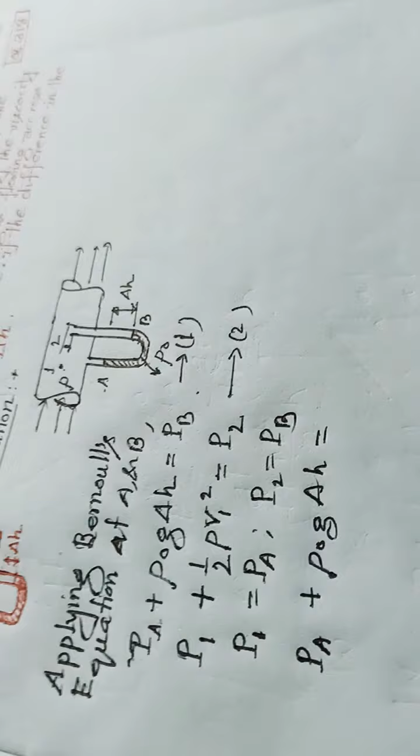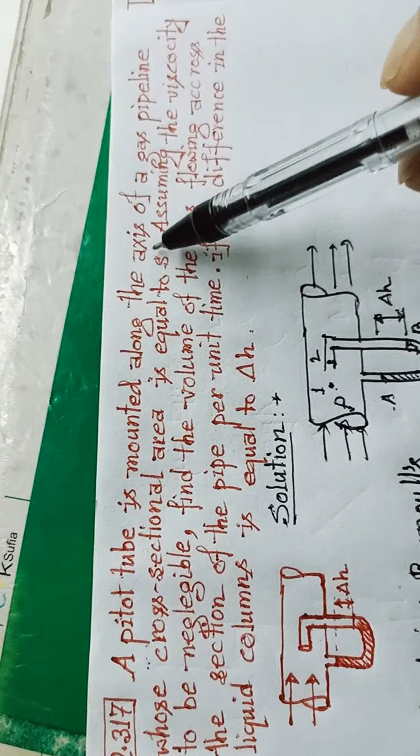Now we are going to solve question number 317 from Irodov. In this question it is given that a pitot tube is mounted along the axis of a gas pipeline whose cross sectional area is equal to S. Assuming the viscosity is negligible, find the volume of gas flowing across the section of the pipe per unit time if the difference in the liquid column is equal to del H.

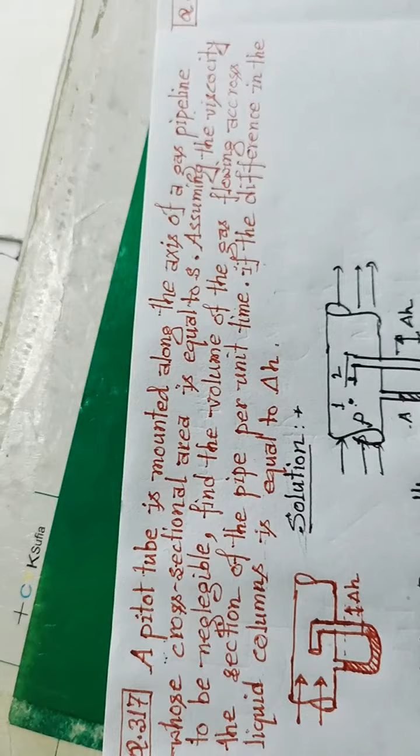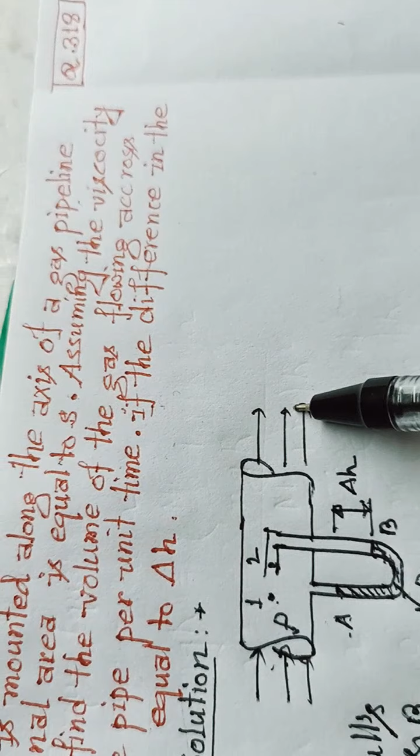So this is our corresponding figure. From this figure we can draw this diagram. In this diagram, this is the inlet section and this is the outlet section, and we are considering 4 points: A, B, 1 and 2. This AB section is filled with a liquid of density rho naught, and the density of the fluid or gas is rho.

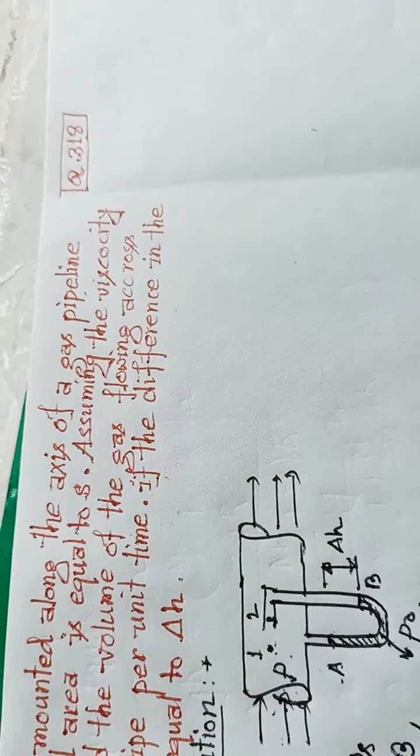Now first of all we'll consider the Bernoulli equation for point A and B. If we consider the Bernoulli equation for point A and B, then it will provide PB equal to PA plus rho naught G del H, because our corresponding figure was like this.

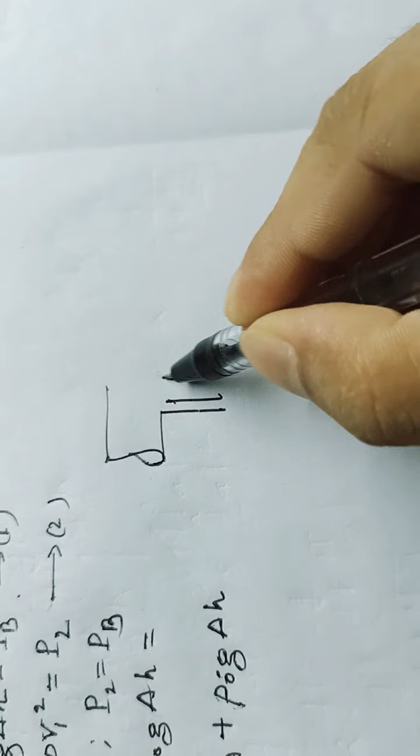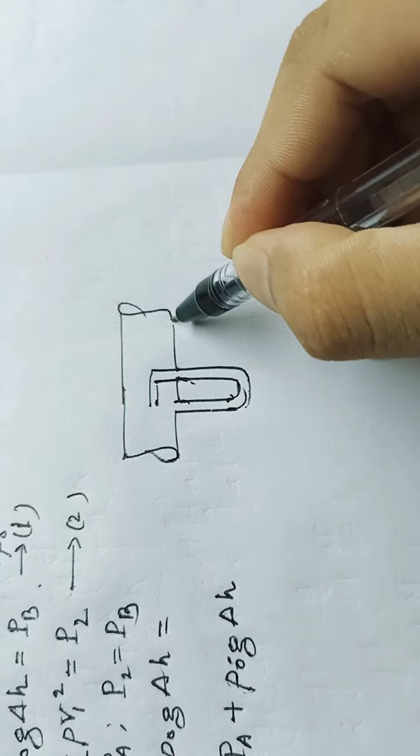This was our segment of the pipe, segment of our pipe, and this is a segment of our pipe. This is the liquid height at this limb, and this is the liquid height at this limb, and the height difference between the two is del H.

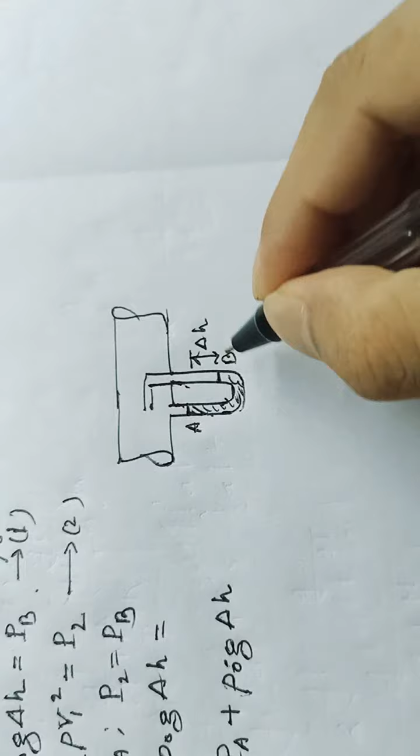Now we are considering point A here and point B here, and let there again be 2 points. One point is this, point 1 is here and point 2 is here, and let this be the inlet segment where gas is flowing, with density of the gas rho and density of the liquid rho naught.

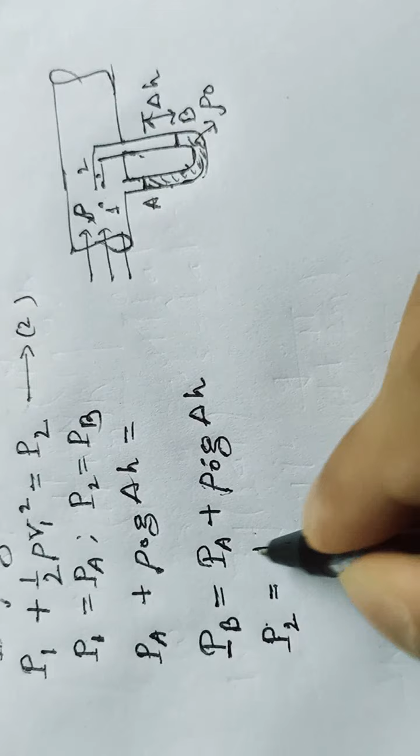So from this equation, if we apply the Bernoulli equation at segment 1 and 2, we will find PB equal to PA plus rho naught G delta H. Again, if we apply the Bernoulli equation at point 1 and 2, from this equation we will get P2 equal to P1 plus half rho V squared.

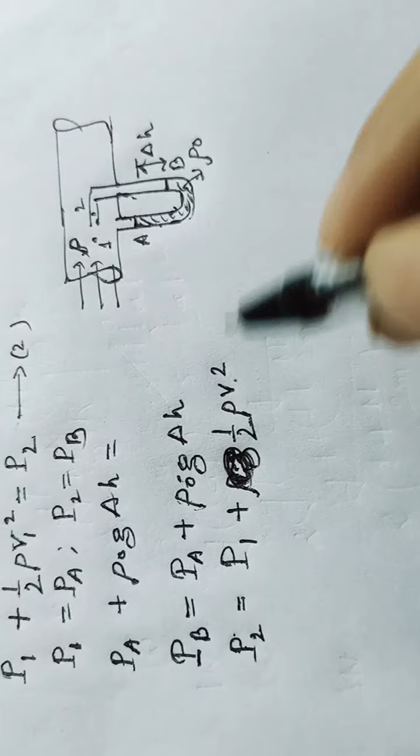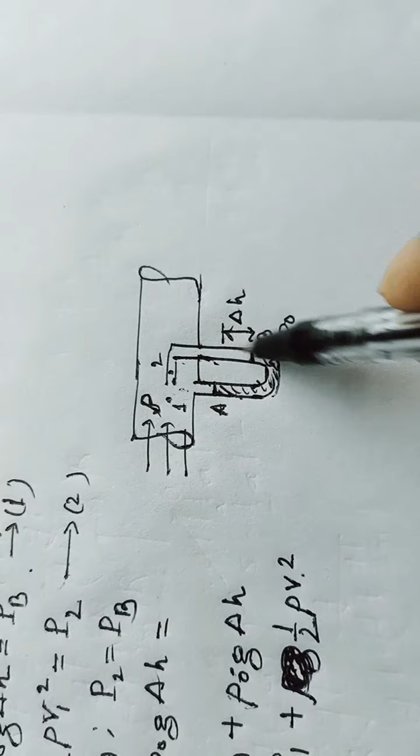So from this figure, as we know, P1 is equal to PA and P2 equal to PB. So we can write P1 is equal to PA and P2 equal to PB. So after substituting this value of PA and PB, we can find PB equal to PA plus half rho V squared.

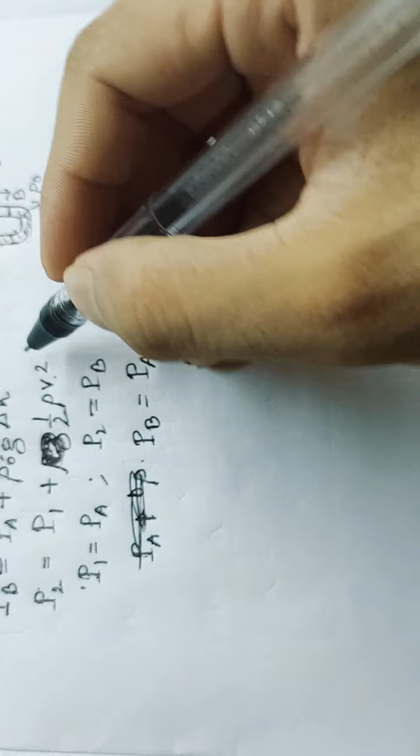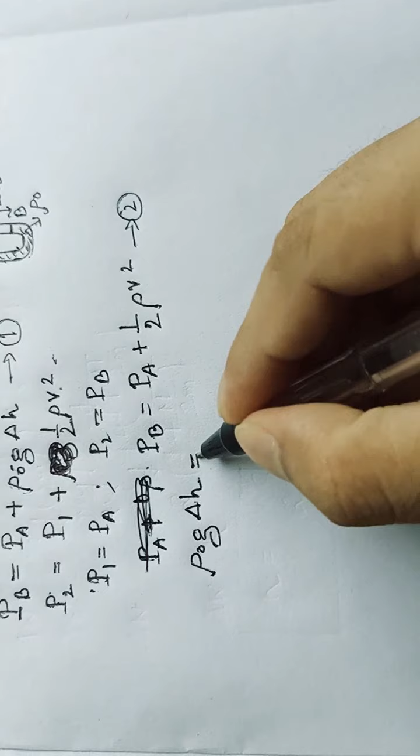So from these two equations, this is our equation number 1 and this is our equation number 2. If we compare equation 1 and 2, we will get rho naught G del H equal to half rho V1 squared.

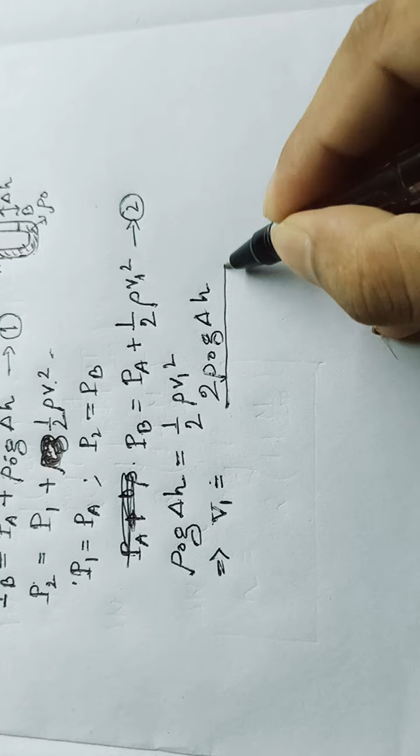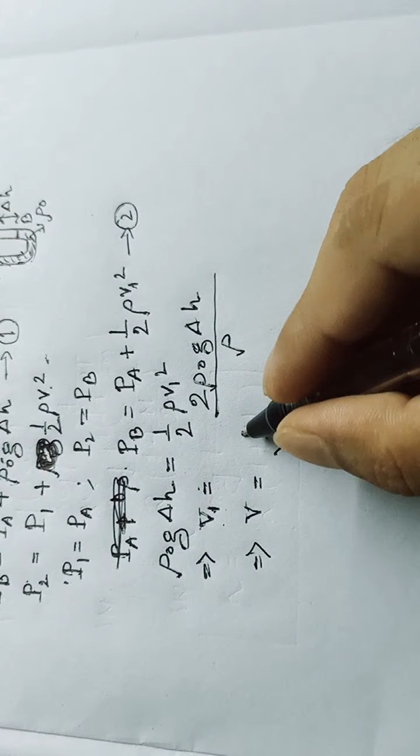Now from this equation we can find the value of V1. So V1 will be equal to root under 2 rho naught G del H divided by rho. So velocity V1 or V, we can express this term as V also. So we can find the velocity of the gas, V equal to root under 2 rho naught G del H divided by rho.

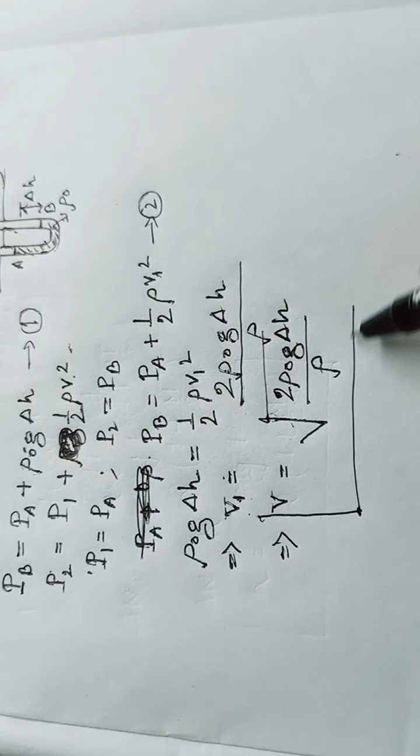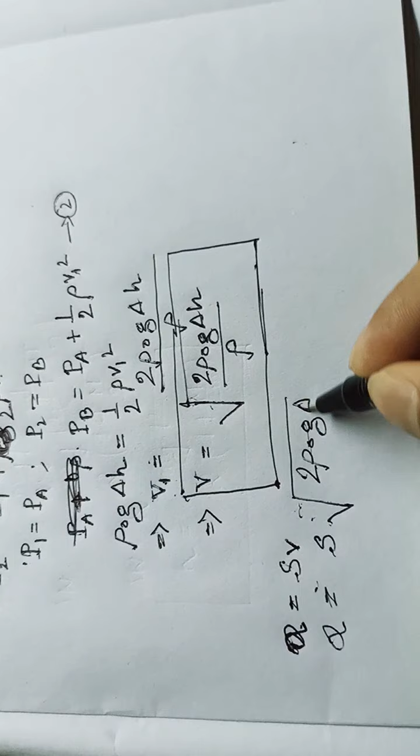So this is our required velocity of the gas in the pitot tube. Now we have to find the volume flow rate. If we want to find the volume flow rate, then our volume flow rate Q will be equal to area of cross section into velocity. It is given in the question that area of cross section is equal to S and velocity is V. So we find the volume flow rate Q equal to S into root under 2 rho naught G del H divided by rho. So this is the volume flow rate inside the pitot tube.